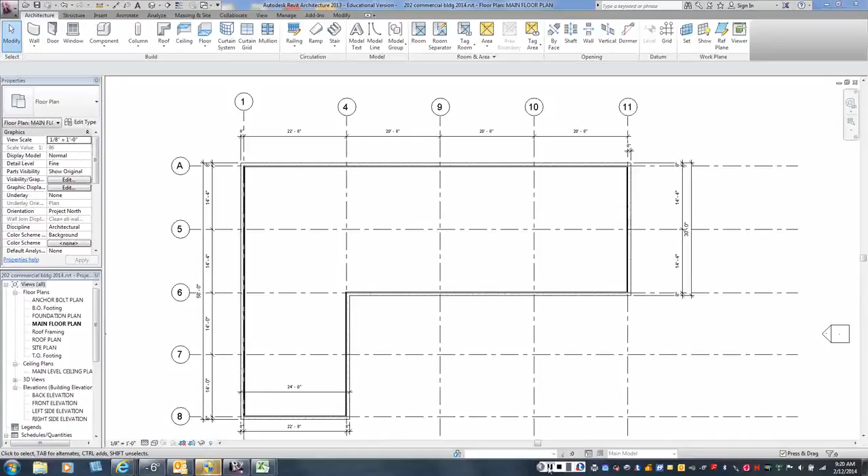We're going to talk today about creating your height elevations on your building. And we talked about the building being modular, so it's masonry construction, so we have to be modular on an 8-inch increment horizontally, right? And we have to be on an 8-inch module going vertically as well. So let's just look at maybe an elevation of our building.

And right now, mine defaulted to these numbers, okay? Saying that level 1 was the main floor plan, and my roof was set at 12'8". I don't know what yours defaulted to, but let's see, does 12'8" work out on an 8-inch module? Yes, okay? You could divide 12'8" by 8 inches, and you would come out with an 8-inch module. So let's say that that is the height of our building. Let's see how that would work backwards to come up with a ceiling height.

So what kinds of things on this type of building do we have to take into account as far as how much lower would the ceiling be than that? So it's a masonry building with a flat roof, right? And when you look at flat roof buildings around, you don't see the roof at all, right? Because the roof is actually lower than the top of the wall. There's what's called a parapet, right? Everybody knows what a parapet is? It's when the exterior wall extends above the roof. That's a parapet. So let's assume commercial construction, what ceiling height would you recommend?

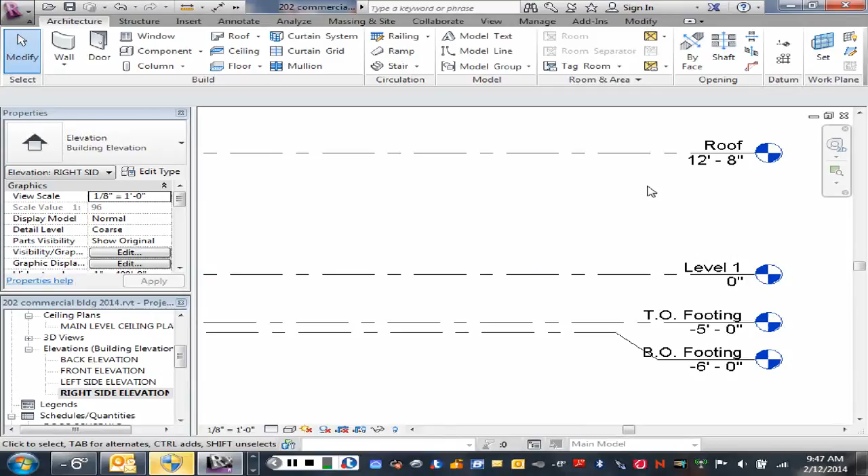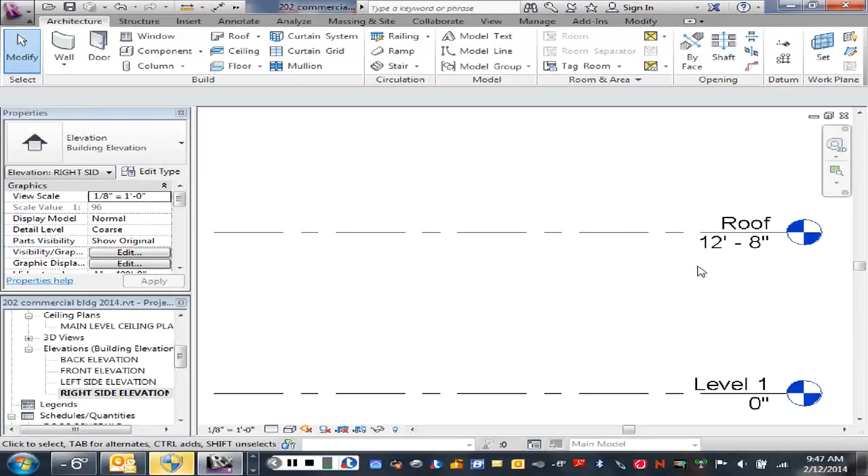And then above that suspended ceiling, we're going to have our structure of our building, which are steel beams and bar joists and things like that, right? So we'll be looking at that here in a second. Okay, so at this point, we'll say that at a minimum, your roof's going to be at 12'8". That leaves us, from a 10-foot ceiling, 2'8" to incorporate steel beams, bar joists, a roof system and a parapet wall above the roof.

Okay, so this is an example of what your structural cross-section sheets could look like. So you'd have a main cross-section through your building over here in the upper right corner, and then a blow-up of the exterior wall where it meets the roof over here. So, like I just mentioned, if our overall wall was 12'8" to the top of this exterior masonry wall, then the things that are getting covered up are the steel beam that has to be incorporated into the wall between columns, and then the bar joists that sit on top of that beam. Now, steel bar joists are different than wood joists, in that typically they are top chord bearing bar joists. Okay? So they hang off the top of the beams.

And we'll talk about that more when we get to drawing our sections, but the height of the bearing point of a bar joist depends on the depth of the bar joist and the length of the bar joist. But for this building, due to our less than 30-foot spans probably, that height of that bar joist bearing is going to be 2.5 inches. That's pretty common up to a 30-foot length. And then once the lengths get longer than that, that height starts getting bigger. It might be 4.5 and 5.5 and so forth. So at this point, we'll assume that that height's going to be roughly 2.5 inches above the steel beam.

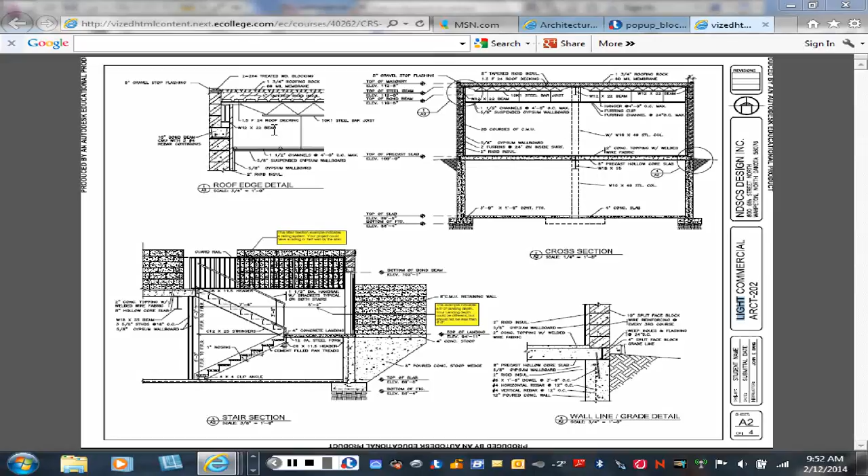So for the purpose of drawing your floor plan, let's assume at this point that our roof is going to be at 12 foot 8. That'll give us our roughly 10-foot ceiling height. And some of you may have decided to raise the center part of the building or even go to a 2-story, you'll have to create a higher level, obviously, right? So let's go back and look at our plan a little bit.

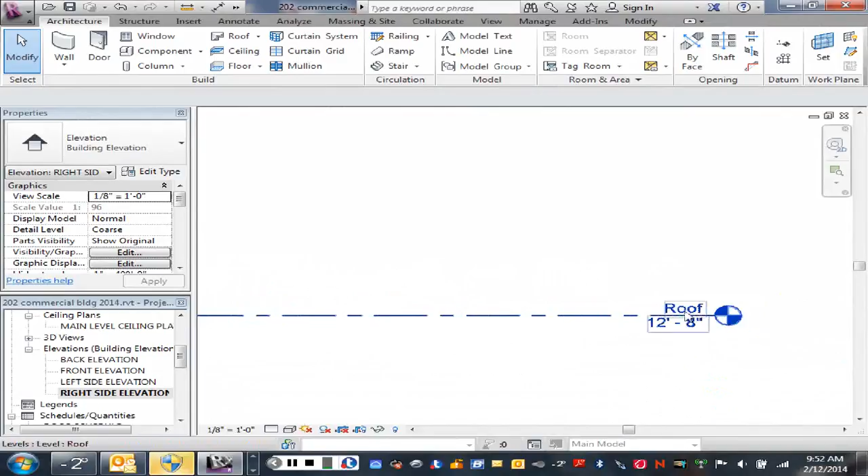And let's say that, dealing with like the sketch I created yesterday on the board here, I wanted to raise that center part of my building, which was right in this area here. I'm going to go over here and I'm going to click on that name roof, and I'm going to say roof-1 maybe, okay? Because I'm going to put another roof a little bit higher.

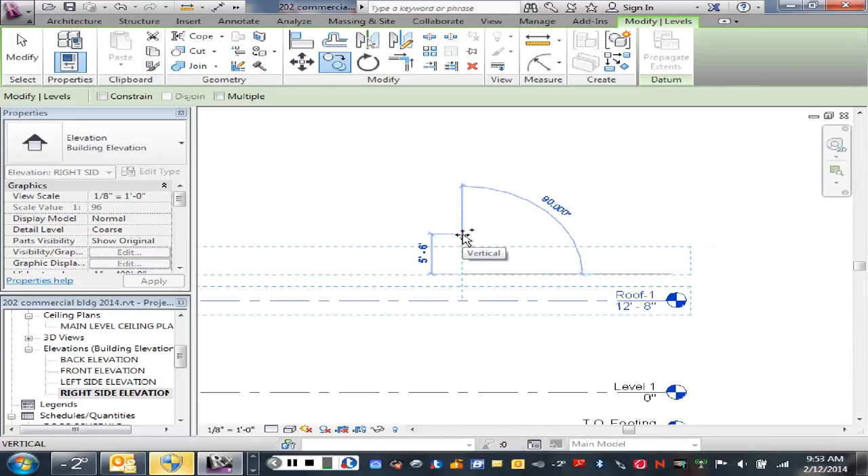So then I'm going to click on this level and copy it, and I'm going to say I want it up, we'll say 5 feet higher than the other roof. Okay, and that automatically will default to roof 2. And it tells me that it's 17.8 above the other one. So at this point I just guessed at what that should be.

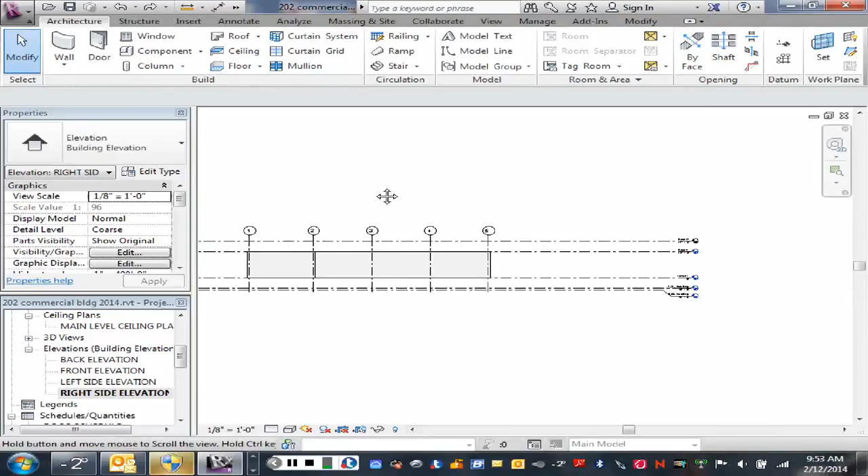After zooming out a little bit and looking at it, whoops, undo that. After zooming out and looking at that, I can kind of tell that's probably a little bit too tall. It's probably going to make my building look a little too tall, so I'm going to change that probably to maybe 15.8. And that would be more appropriate for my building, but your buildings could all be a little bit different.

That would be the level of, let's say you're going to put a standing seam roof or a sloping roof up there. That would be the height of the low end of that roof, and it would peak up above that. Okay, so that would be the bearing point of the trusses or whatever you're going to have on that upper level. Okay, any questions about that? Okay, let's go down then from this level down.

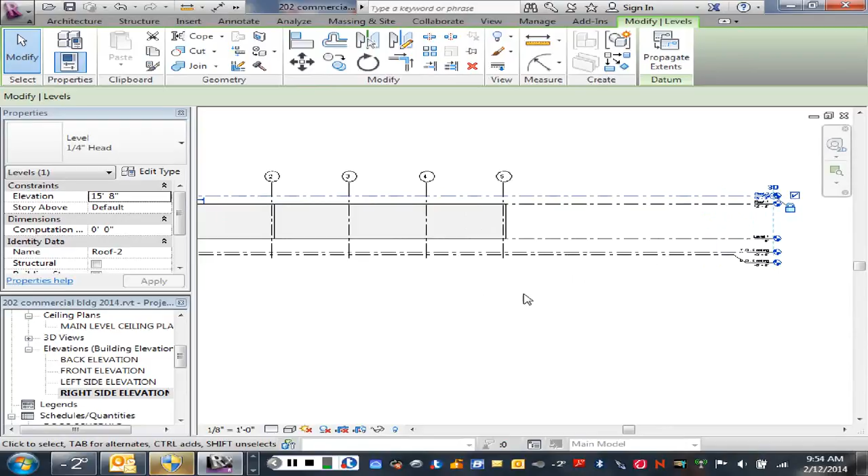We talked about putting a basement in this building. And if we put a basement in this building, it's commercial construction, so one option would be, again, to go with bar joists and beams and put a metal deck on that and then pour a concrete floor on top of that. That's one option. The other option is to go with precast concrete planks. You all familiar with precast concrete planks? Probably talked about that in your methods and materials class a little bit. Okay, so we're gonna opt for that.

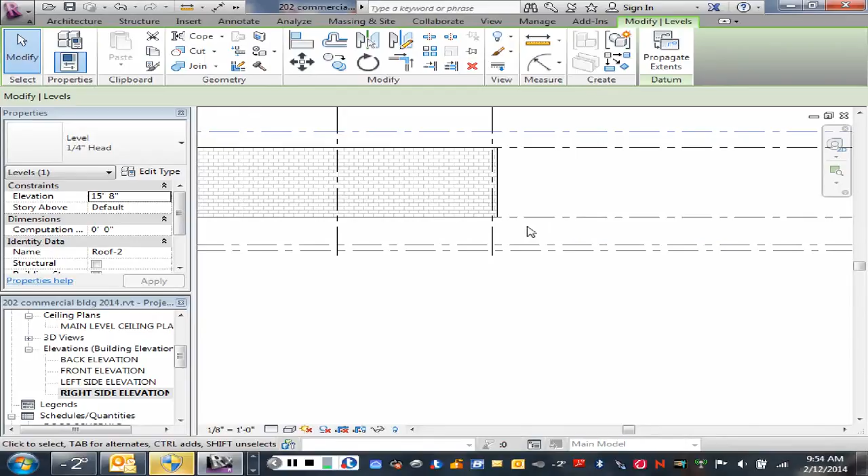So we're going to say that our precast concrete planks are going to be 8 inches in depth and thickness. With an 8-inch precast plank, we can span up to about 30 feet roughly. But again, we can look that up and find that information out. With precast concrete planks, you're going to be required to have a topping of concrete over top of that because the planks are irregular on top. So you're going to have to pour a topping on top of that to level them out.

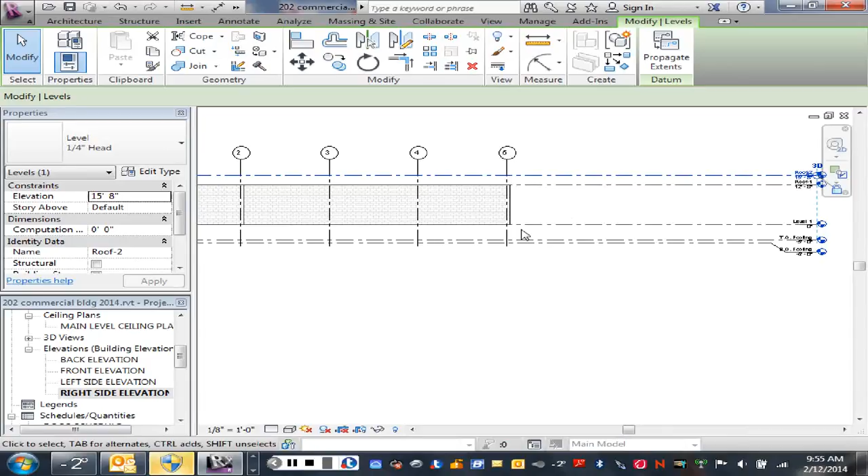So level 1 will be the height of our precast. We'll pour topping on top of that, which is going to be 2 inches thick. Now that might affect our ceiling a little bit. Maybe our 10-foot tall ceiling now became 9 foot 10, because of that. That's not a big problem. We can solve that later.

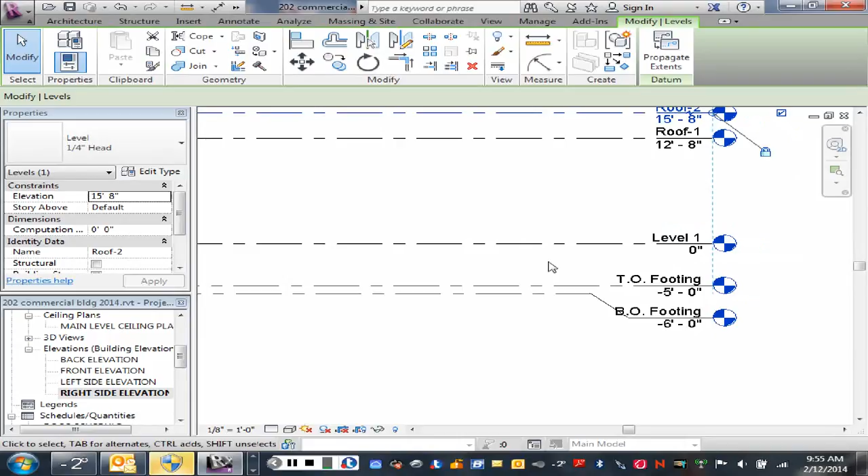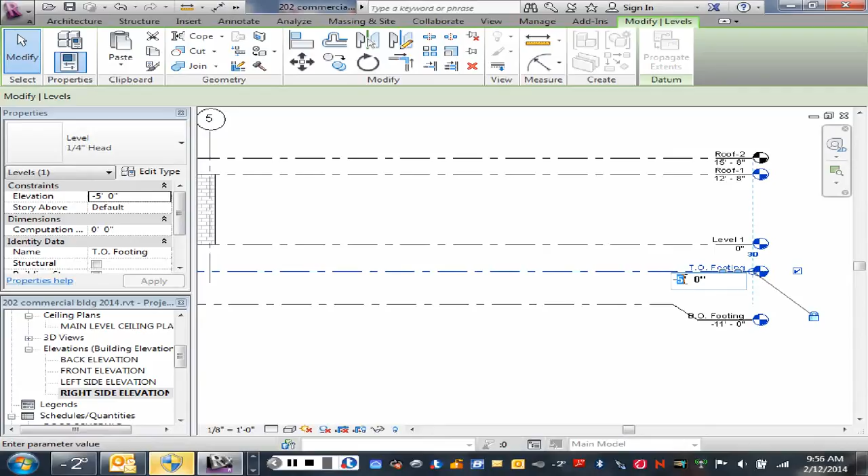Okay, down in our basement, again, because it's commercial, I want to lower that basement. I want that basement to also be roughly 10 feet tall. So I'm going to lower this footing depth first off. I'm going to drop that down to minus 11 for now. And then I'll take the top of the footing and make that 10. Okay.

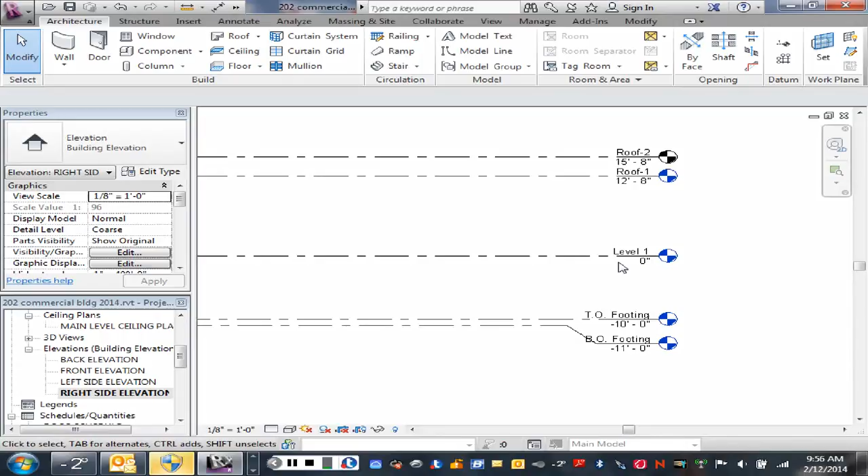Now the top of my footing is 10 foot below the top of the precast, right? The precast is 8, so now we're 9'4" to the bottom of the precast, and now I got to add a 4-inch floor in here, so now I'm 9 foot with my basement ceiling. That'll work. So we'll make the top of footing at minus 10 feet, and the bottom of footing then at minus 11 at this point.

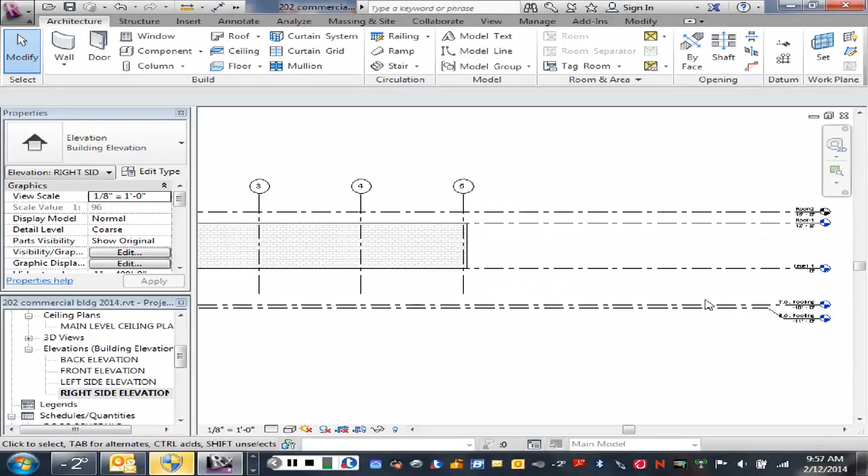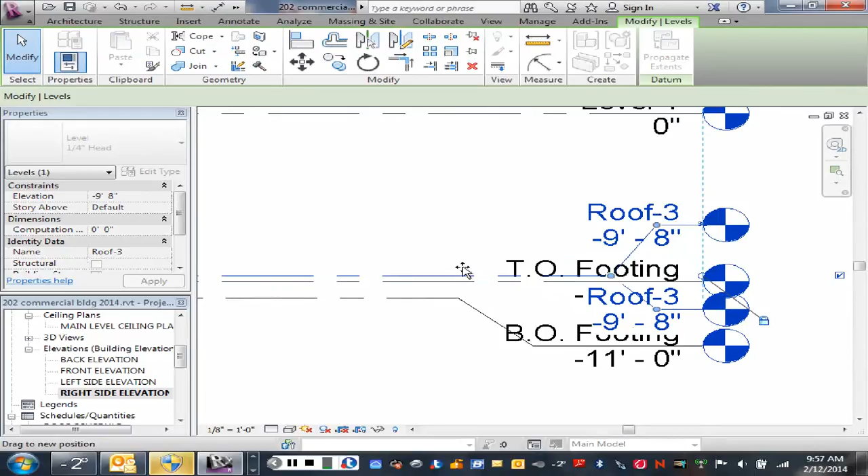So if we want to put in another level that is the basement floor, we could put that in. So we could take this top of footing one, copy it up four inches, put a break in it, bring that break up, rename that basement.

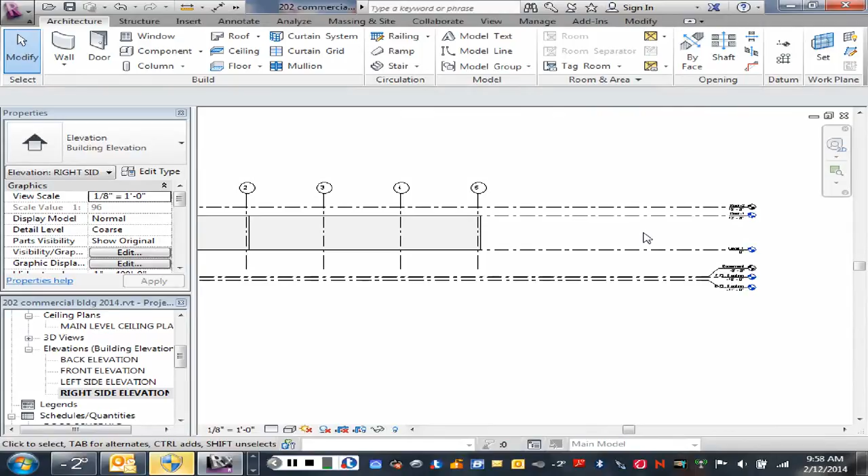Okay, and now we have those levels. Okay, so those are the heights I recommend. If you want to make some adjustments to some of them, you can, but that's the process behind doing that. Okay, any questions about that?

Okay, one other thing before I stop here is I'm going to go back to my floor plan. And yesterday we talked about that exterior wall and about the columns being in the corners, and what the makeup of the exterior wall was going to be was 8-inch concrete block on the outside, right? Then 2 inches of rigid insulation, and then 5/8 gypsum board on the inside. Did you modify your exterior walls?

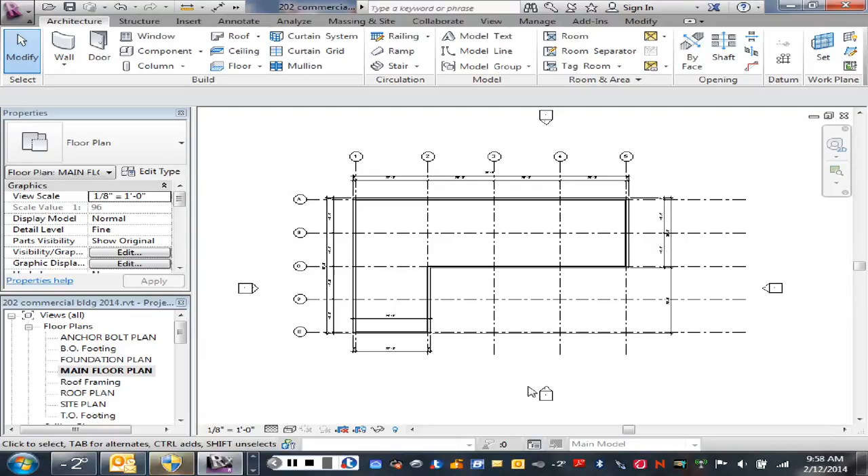Okay, so we need to make an adjustment on your basic wall that you threw in to start with. And in this case, I created a new one that I called 8-inch masonry with furring and gypsum board. Okay, I went to edit the type, I duplicated it, renamed it, and then I kept my structure as being the 8-inch masonry, which is actually 7 5/8 actual.

And then I put in a thermal layer, which is the rigid insulation, which is 2 inches, and then the finish, which is gypsum board 5/8 inch. Okay, so that'll be our exterior wall. Okay, when we get to the top of this exterior wall, like I just talked about in the levels, we're going to switch to a thinner wall, right?

So a couple ways of doing that. We can put in a reveal, right? So that 8-inch now becomes a 4-inch or whatever it has to be. Or we can bring our 8-inch masonry wall up to a height of whatever it has to be, 10 foot or whatever it has to be, and then on top of that put a different wall. So that's another way of doing it.

Sometimes the reveal gets a little messy, and you can just start a new wall up there and make it start at 10 or 11 feet off the floor, whatever it is, and go up to the 12'8" point. Another way of doing it. Okay? So I don't care which way you do that.

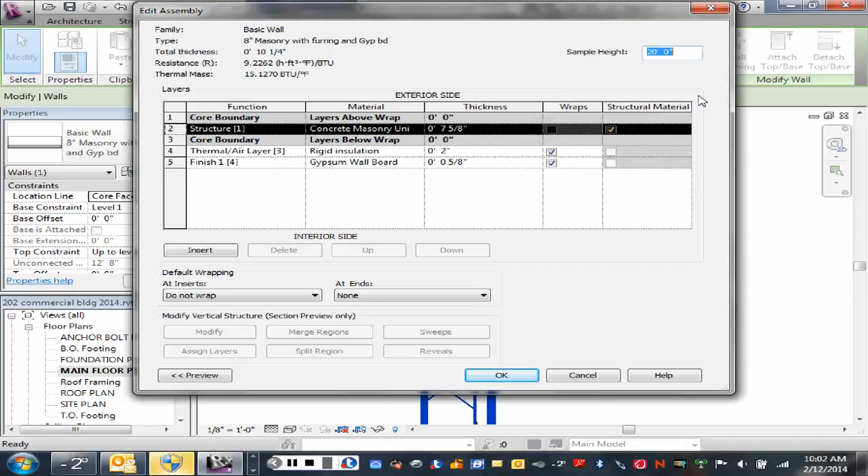So that's going to end what I'm talking about right now. So we need to work on that floor plan. Try to get that as far as we can by the end of Friday, right? Okay.